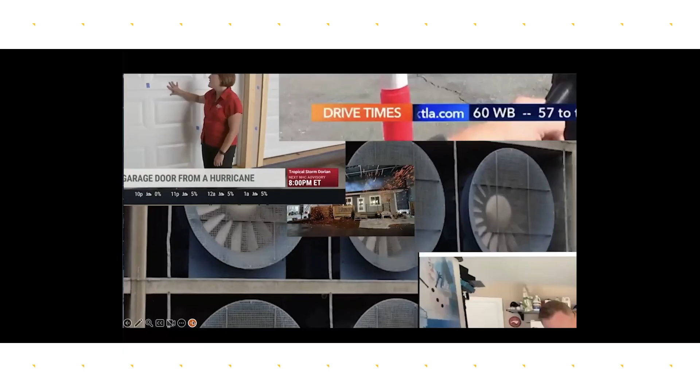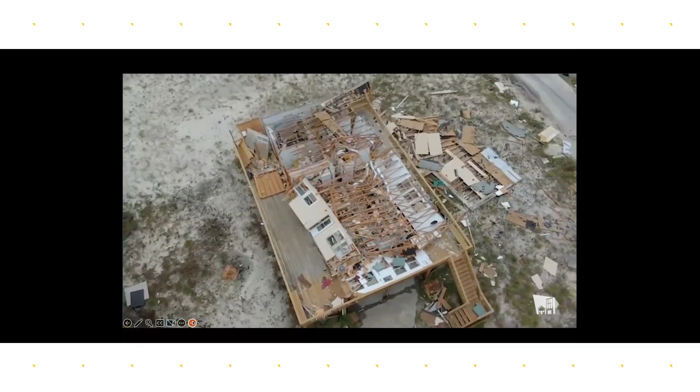So with that, I will show you a lot of our work is out in the field and looking at post-disaster investigations, whether that be hurricanes, derechos, tornadoes, wildfire occurrences, looking at the building stock that exists in that area after the storm comes through and really taking a look at what principles of that property made it survive, as well as being able to recreate and simulate those experiences in the lab helps us identify what the weakest link was, and then to shore up those weakest links in the property to make the properties more resilient.

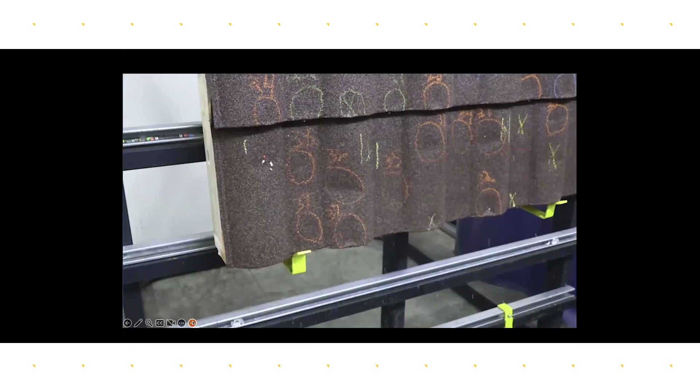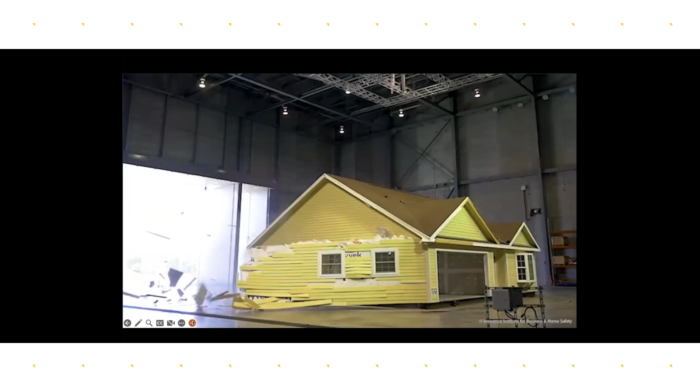We have a hail field study that goes out into the field every year. This past year, they spent 6 weeks out in the field. It was 19 different organizations, and they really did a deep dive on hail swaths. If you've ever seen the movie Twister, you can kind of think of it in that regard. They were chasing hailstorms and identifying the properties of the hail, the concentration, the sizes, things of that nature, where it's most likely to fall.

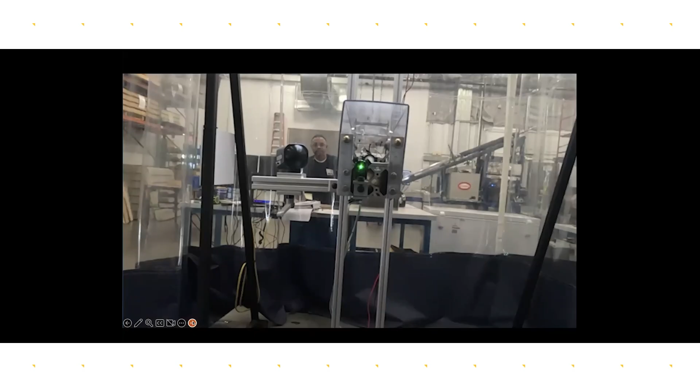These are some of the research experiments that we've simulated in the research center itself. So this one was in particular on the roofing materials and how it was affixed to the property. We call that the continuous load path. We look at things like interior water losses and what's driving that, whether that be windows, doors, mostly on roofs. We have a hail cannon in the lab where we impact test different materials on the exterior cladding.

And then obviously we're doing wildfire testing as well. And I'll kind of dig into that a little bit more today. But we did 11 accessory dwelling unit burns last year to kind of identify the structure separation that was necessary in order to keep homes safe at a normal distance.

And so, as I mentioned, wind, hail, wind-driven rain, and wildfire, those are our perils, and that is largely driven by the losses that are happening in the insurance industry. We are fully funded by the insurance industry still to this day. And so they heavily play into the research that we do in the lab. So this is the lab.

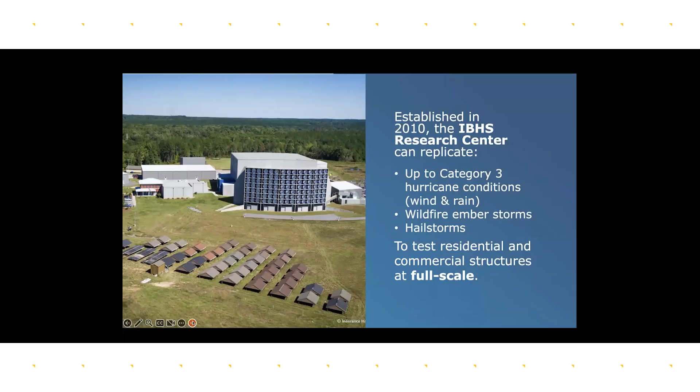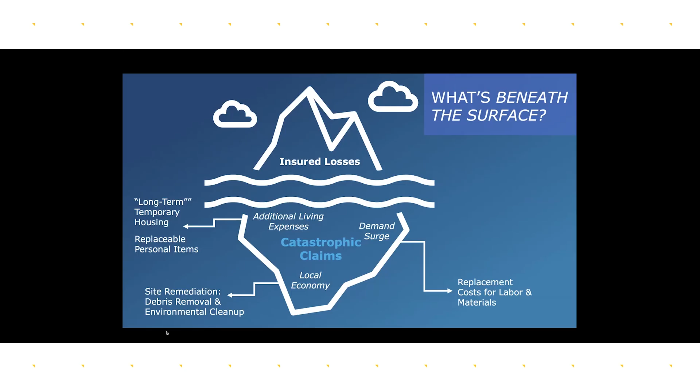These are the perils. This is really about the insured losses are really just the tip of the iceberg. There's a lot more going into it than that. You've got climatic events. You've also got demand surge that occurs after an event. You've got a lockup in labor and construction materials.

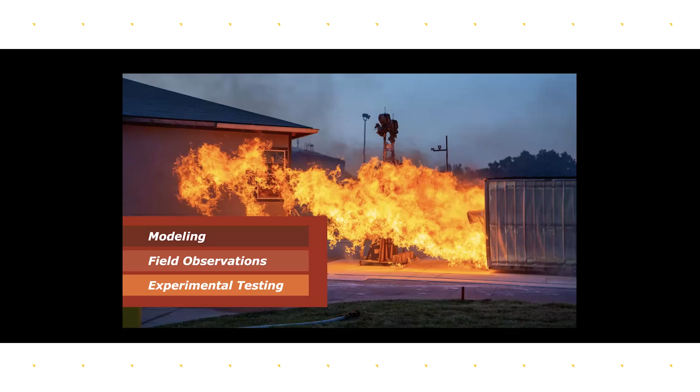And so, what we're doing to try to identify these weakest links and reduce the overall losses and keep people in their homes is we're looking at the wildfire models and the climatic conditions that go into a conflagration, and then we're doing the post-disaster investigations, bringing that back to the lab to form a hypothesis and do some experimental testing and find those weakest links.

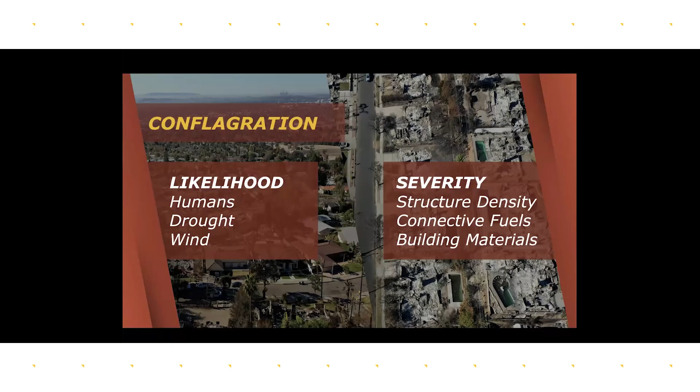Conflagration follows humans, drought, and wind. Those are the kind of ingredients that go into the recipe to cause a conflagration. And the severity is determined based on the structure density, the connective fuels, and the building materials in that environment that really fuel the fire. If there is no wind, it is a much less severe event.

And so, what we see with all of the rapid wildfire conflagrations is you've got these winds that are at least 50 miles and above. I think Lahaina was 70. LA fires were up to 90 and higher. And so you really see the wind that is causing the embers and the flames to transfer at a greater distance. When the embers are able to find a combustible material, then they are spreading that fire into the community.

Once it gets into the building components, it becomes a conflagration, and it just burns so hot. The wind really hinders the fire suppression ability. So what you see is local fire departments that are really just overwhelmed and unable to make an impact on stopping the fire from progressing.

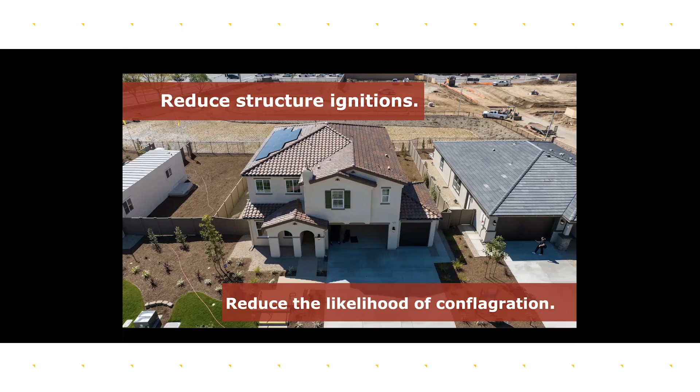And then once the home ignites, there's a 90% chance that it will completely burn down. And this is a statistic from CAL FIRE, which is one of our critical stakeholders and partners in this space. We've actually hired some former chiefs who have been with CAL FIRE before, and were on the ground in the LA County fires while the conflagrations were still occurring, meeting with the CAL FIRE crews and going out and doing the post-disaster investigations. So if you can reduce the structure ignitions, you can reduce the likelihood of the conflagration.

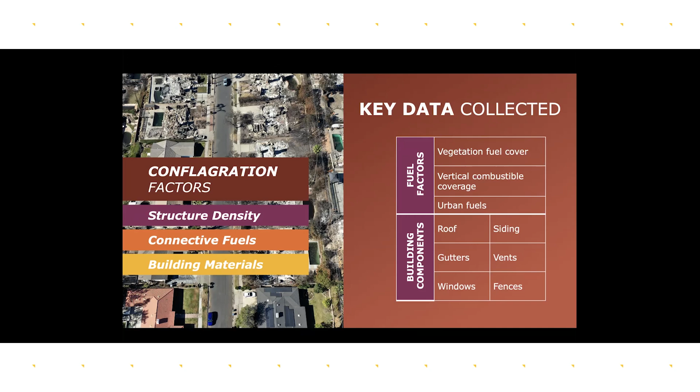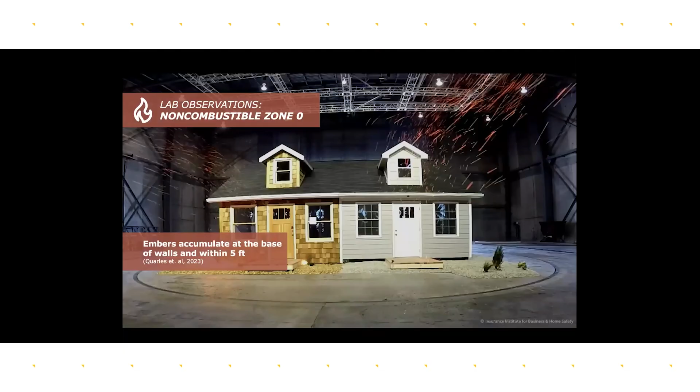We've studied a lot of key materials and what goes into the making of the conflagration and the different materials that can burn in the lab. And this is just one observation where we're looking at ember accumulation. There's a lot of embers that get thrown at a property when you've got these wind conditions and a wildfire event. And so the embers will find whatever they can to ignite.

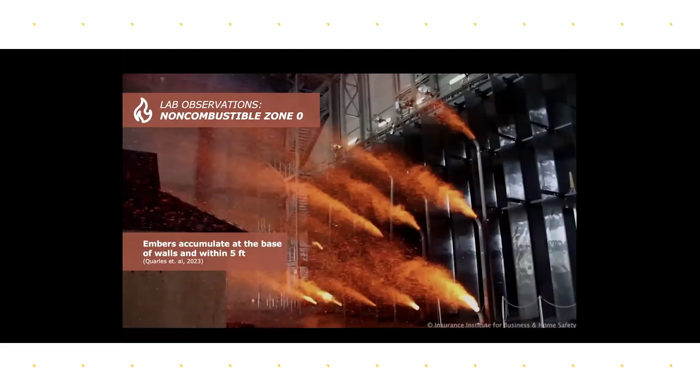This is actually a simulation that was done in the research facility. We've got ember generators, and then we're using the fans to kind of propel those at different materials and testing those data elements. That has all culminated in the Wildfire Prepared Home program.

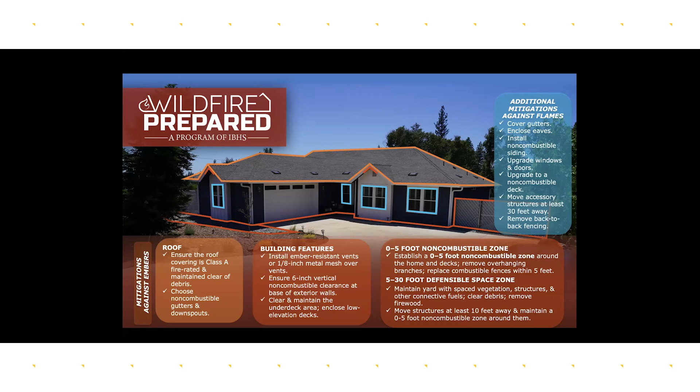We have two levels, base and plus. Base is really available as a retrofit option, and then plus is more of a new build because you're going to get into things like the exterior siding and the windows and things of that nature. And so, there's different price points that go into that. We can talk about that a little bit.

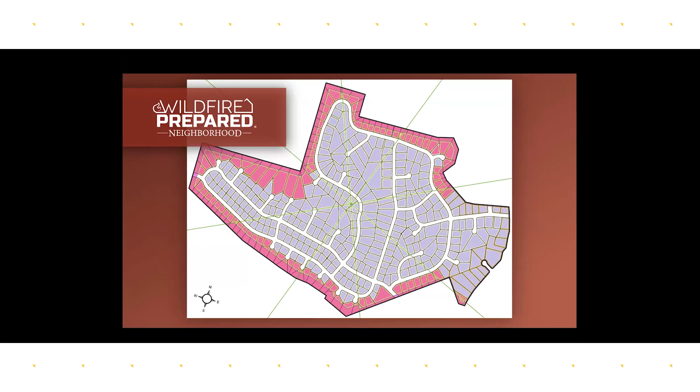So the way we look at this with Wildfire Prepared Neighborhood, which was launched in July of this year, is really protecting the pink houses, the ones on the perimeter, from flame contact. Those would be the Wildfire Prepared Plus level, and then anything on the inside, you're really protecting from embers, those floating embers that are being driven by the wind.

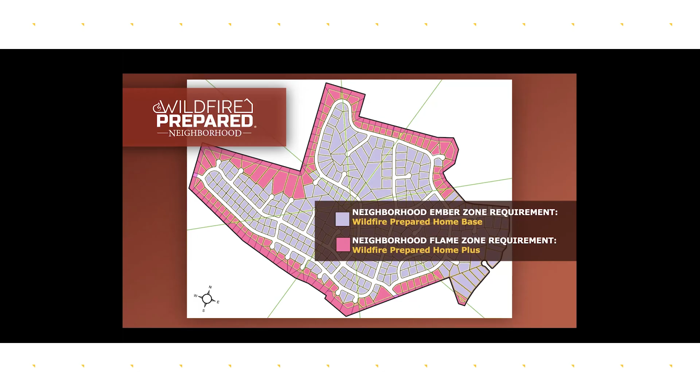And so the homes on the interior of the neighborhood would be built to the wildfire prepared base level. We do have our first wildfire prepared neighborhood that was established in Escondido, California. KB Home is a developer that builds in that area. They had seen a wildfire demonstration that we did in Anaheim during the Pacific Coast Builders Association conference. And they decided to kind of retrofit what they were planning at the Dixon Trail development.

And they ended up developing a wildfire prepared neighborhood, and it didn't cost that much more. They were able to get some economies of scale, being that it was at the neighborhood level, and it was really just $3,000 more per home and they built them all to plus, just for that added protection. This allowed them to get insurance much more quickly than they might have otherwise.

So we still have some challenges in this space. The zone zero regulation has been a challenge, and then really getting neighbors to collectively act together in this space in a really meaningful way. So we're working with the local officials there, policy development, and codes experts in this space. So that's a bit about the organization and our work at IBHS.

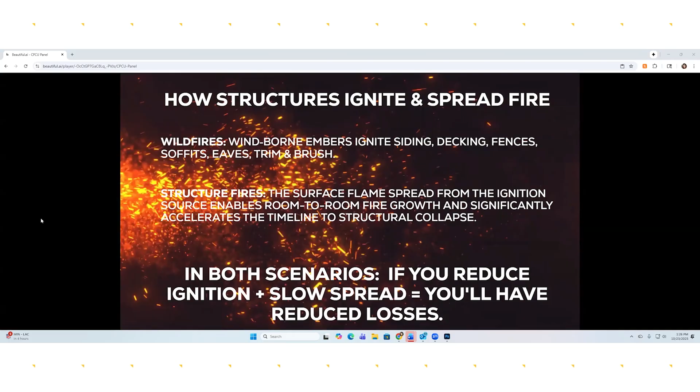So while wildfires are a huge concern, we also know that there are still a lot of structure fires that are caused by other sources. 49% of home fires are caused from cooking. 20% are caused by heating equipment. 12% intentional acts or smoking. A lot of wildfires fall within those kind of intentional acts.

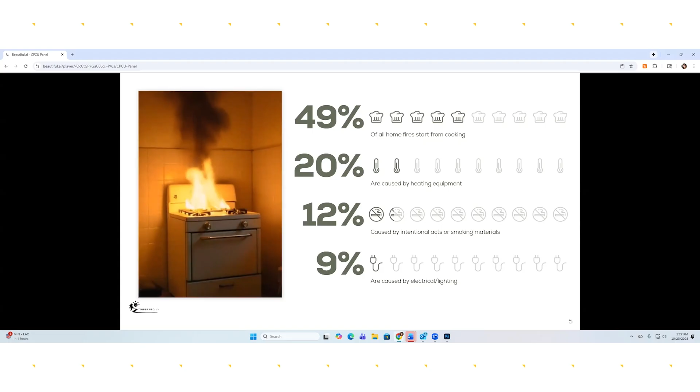And 9% are caused by electrical and lighting. That's actually another pretty big component of wildfire spread, electrical lines in windstorms and power storms. So we wanted to create a product that addressed all of these potential fire sources and concerns. The key reality is that fire loss is driven by the spread, not necessarily just the ignition source. So if you can control the surface ignition and the spread, it's most effective for reducing the total loss outcomes.

So Matthew's going to tell you a little bit more about fire retardants and their classification for coatings. Yeah, so I'll kind of lay out what we did. We took some Douglas fir from Lowe's, just a big box store, and we wanted to be authentic to what people actually really use. And we coated it with our EmberGuard fire retardant, and we put it in a Steiner tunnel. You can see it here in the video. It's a big long tube, and they have torches on one end. They light it up, and they want to measure the flame spread index, the FSI, and the smoke developed index, the SDI. Something we're going to emphasize here heavily is the smoke development index.

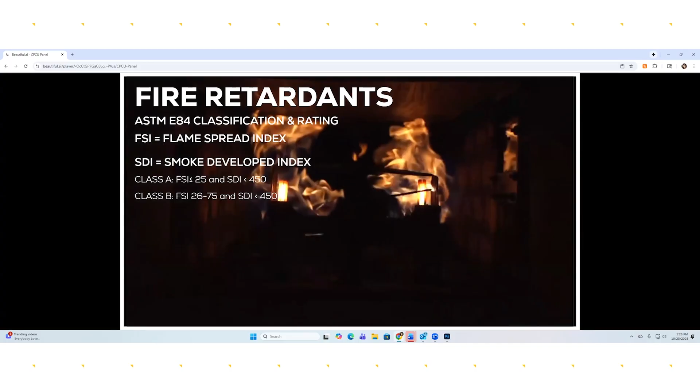So, as a wildland firefighter, my first job is to make sure that life is protected, and then secondary is the structures. That's just our job. And so, when we made the fire retardant, we wanted to make sure that the SDI was as low as possible. So you have a class A rating between 0 to 25 for the flame spread index and an SDI, the smoke developed index, between 0 and 450. And Corinne has the reference point for what that would be. That's 100 and, what was it, 110?

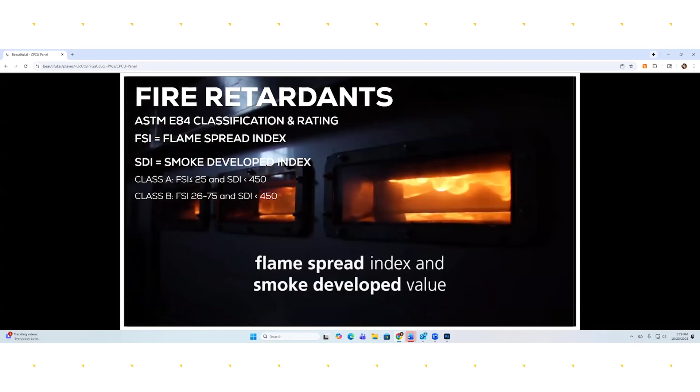So typically the smoke development index for red oak is 100. For Doug fir, it is 70, and they also base the flame spread index off of how fast red oak burns. So red oak, that's very flammable. It burns fast and hot. So that score is 100. If the flame spread rating is 25 or less, it means that it burns 25% as fast as red oak would. And honestly anything less than 100, you're getting better and better in terms of survivability inside of a building with the smoke development index. You want to get as close to 0 as possible.

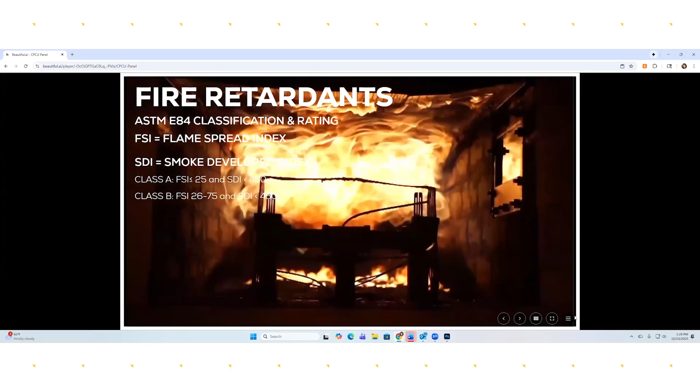But you can create a fire retardant that's a class A because you pass that flame spread index of 0 to 25, but you have a product that produces 450 on the smoke and still get a class A fire retardant, which is, in our perspective, not okay because the occupants would no longer be alive. That being said, one of the reasons we do focus on the smoke developed index is that 60 to 80% of all enclosed fire-related deaths are caused by smoke inhalation.

So being able to control the smoke is a huge driver of saving life. It also gives people more time to escape the structure. It gives firefighters more time to get in there and safely fight it if you're suppressing that smoke. So it's just extending the timeline of how long someone can survive, how long someone can fight the fire. So that was a really important part of our product development, looking not just at flame spread, which is incredibly important, but also the smoke developed index as well.

So all those factors being considered, we developed our product called EmberGuard. It is a Class A fire retardant under the ASTM E84 test, tested by QAI Laboratories there in California. It is one of the first fire retardants on the market that we have ever found, that the lab has found, that has an SDI score of 0, which means it is virtually smokeless. It is not producing any smoke. When flame does spread across and slightly char it, there's no smoke produced.

It also has a flame spread index of less than 25 for the Class A. It's a semi-permanent mineral-based barrier, which is relatively unique in the fire retardant space. Our product is non-toxic, it's 0 VOC, it has a health product declaration and LEED credits available for it. It's also water resistant and helps with dimensional stability of your lumber.

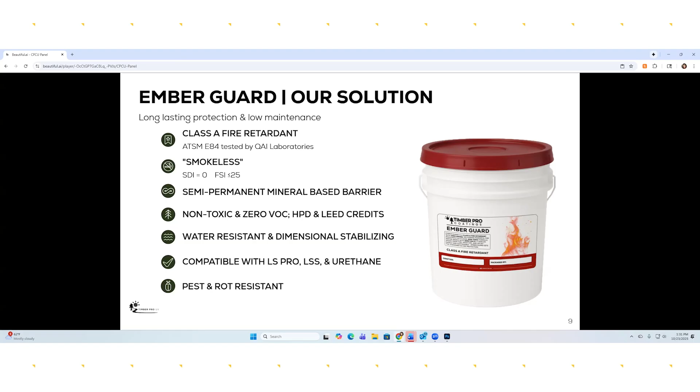So does it go over top of the paint or underneath the paint? It would go underneath the paint. It goes on raw siding, or it could be put on framing, OSB, subfloors, walls, any uncoated wood surface, but then you could stain or paint over it. So it's for untreated wood surfaces initially.

One of the things that's unique about it is the mineral barrier perspective versus intumescent. Most fire retardant coatings are intumescent, which means that they form a layer of foam on the surface that kind of insulates that material from char. That char layer on an intumescent coating is vulnerable over about 600 degrees Celsius. When it chars, it does produce smoke, and that smoke contains halogenated gases, ammonia, cyanates, and carcinogens most of the time. So not great to breathe in intumescent smoke.

It's typically an opaque paint, so it hides the natural wood. It can degrade outdoors over time with UV, moisture, and mechanical wear and tear. It's film forming, so it requires pretty strict thickness controls, which means more intensive application procedures that are less likely to be able to be done by a layperson. Most of them require maintenance recoats every 3 to 5 years.

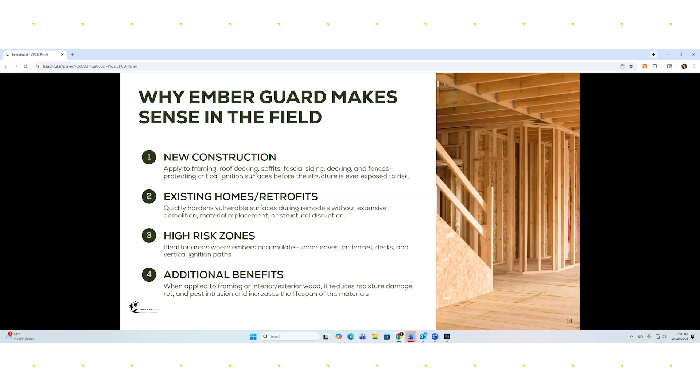Great. I'm so sorry, so that we can... we're all set. We're done. So yeah. Well, please continue on. Yeah, as I said, it's like a miracle.

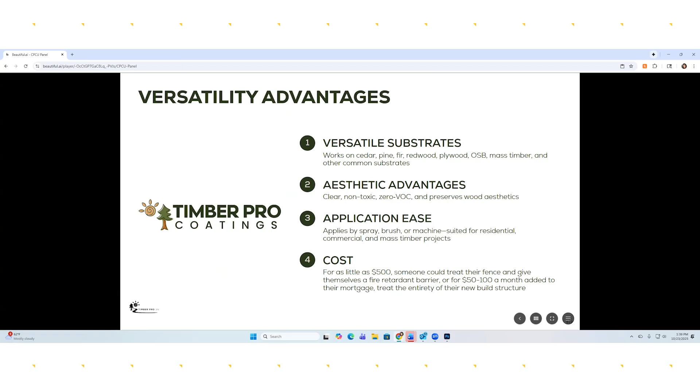So Dan, I think you probably have a solution also that you'd like to enter into the conversation. Sure. Can you hear me? Yep. Yes. I'll probably be a little less product oriented than Karen and Matt, but that seems like an amazing product. And Jennifer, great presentation. Thank you, David, and the CPCU community for organizing this discussion.

I am going to tell you about Inventwood, I am going to tell you about Superwood, but just by way of background, I spent most of my career on Capitol Hill, lobbying for the real estate industry, working with the stakeholders in the real estate industry, the building and construction trades, the shopping center folks, the industrial office parks folks, et cetera. And after a long career in lobbying, got into technology innovation and have always sat between what I would call the impediments of government and the opportunities of government and technology innovation.

And I came to know Inventwood at the University of Maryland, right close to Capitol Hill, where Professor Liangbing Hu, now the head of material science at Yale, was inventing this amazing product where he densified wood to achieve amazing properties, which I'll tell you about.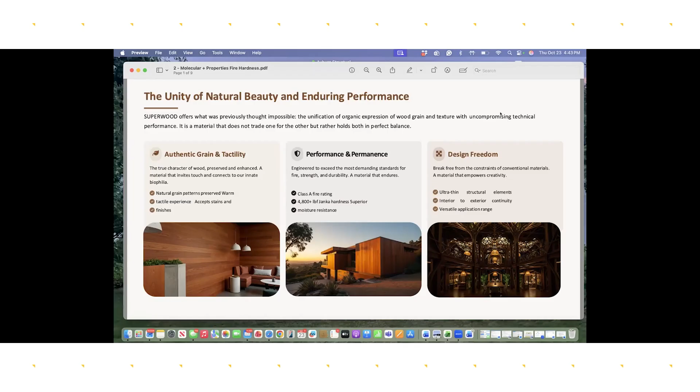Now, on these slides here, I'm showing you characteristics of Superwood. We are a startup out of the University of Maryland that got substantial funding from the DOE, has gotten support from DARPA, has commissioned an 89,000 square foot production facility in Frederick, Maryland, where we are commercializing Superwood. Superwood has very interesting characteristics.

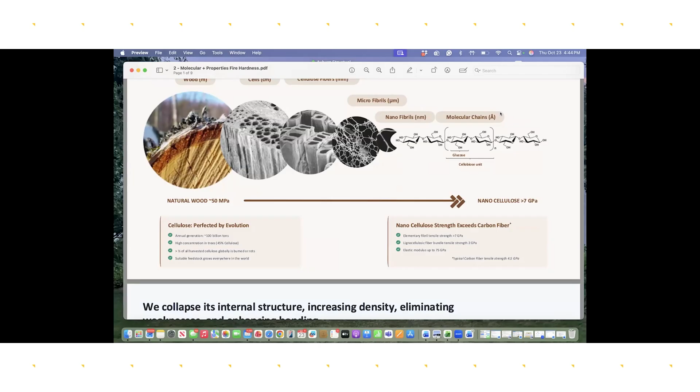What we've done is we've taken regular dimensional lumber and we've changed and re-engineered the molecular structure of the wood to create a material that is extremely strong, extremely durable, extremely fire resistant and resistant to all environmental stressors. Basically, if you think of a tree as a straw and you think about it being densified to where there's absolutely no porosity whatsoever in the wood. I was holding earlier an example of a piece of dimensional lumber and a piece of Superwood. The Superwood is about the same mass, but about a fourth of the original volume of that dimensional lumber.

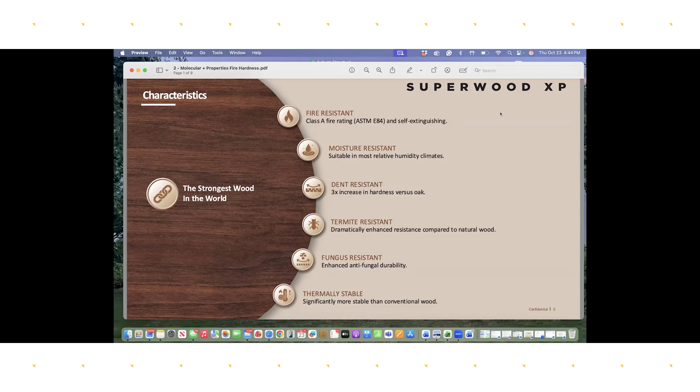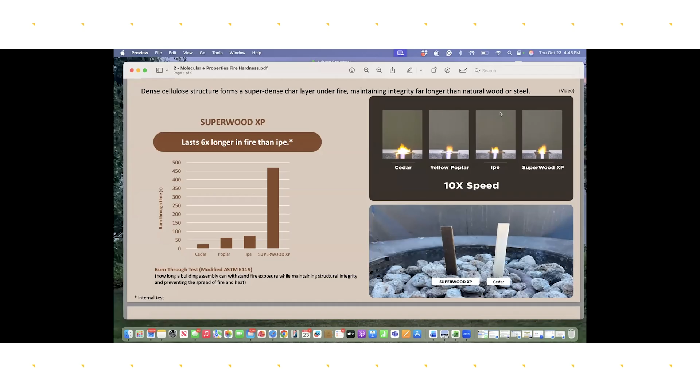It is fire resistant, moisture resistant, dent resistant, termite resistant, fungus resistant, and thermally stable. It is the strongest wood in the world. And if I didn't have this in a PDF, I could show you at 10x speed how, because the material has absolutely no porosity, I can't see my screen here. I apologize. I'm going to push that out. I think it takes 6 times longer for it to burn than Ipe, which also gets a Class A fire resistance.

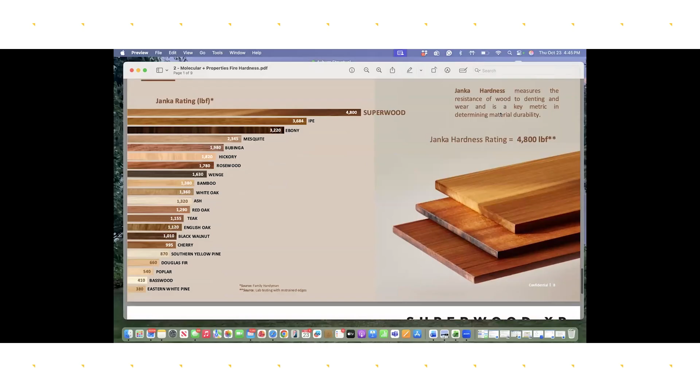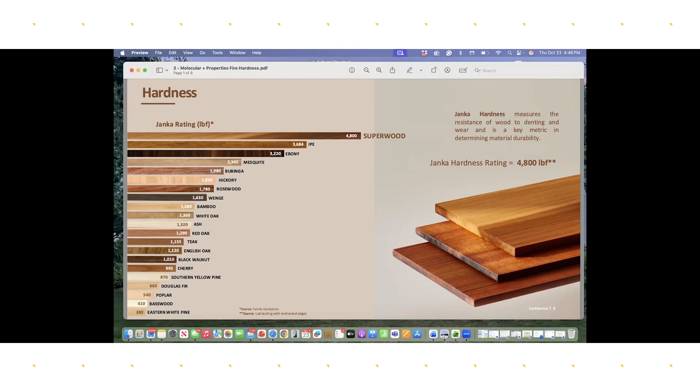The material is species agnostic. So right now we're making Superwood from reclaimed poplar, which gives us a real negative net zero carbon. So this would have been wood that would have gone into the landfill. And we've tested, I believe, 19 different species. We get the same result from all these species. So no matter what is the abundant species in an area where we could be producing Superwood, we can produce Superwood.

So for insurers, this creates a tangible opportunity to recognize and reward materials that reduce ignition risk and structural loss potential. Integrating these advances into resilience scoring, premium credits, and retrofit programs aligned with low carbon policies and life cycle assessments could yield measurable reductions in both physical and financial risk.

We've had recent articles in the Wall Street Journal, a big article in CNN last week. We've had tremendous interest from California homeowners in the WUI fire districts. And California is already mobilized for wildfire and forest resilience. The next step is to connect that investment to the built environment, transforming forest restoration into safer, lower carbon homes and infrastructure. And that's the opportunity that turns risk into resilience by aligning public policy, private capital, and material innovation.

Thank you. Hopefully I got you back on track. David, I think you're on mute. Yeah, sorry about that. Daniel, just in the couple minutes that we have left. Sure.